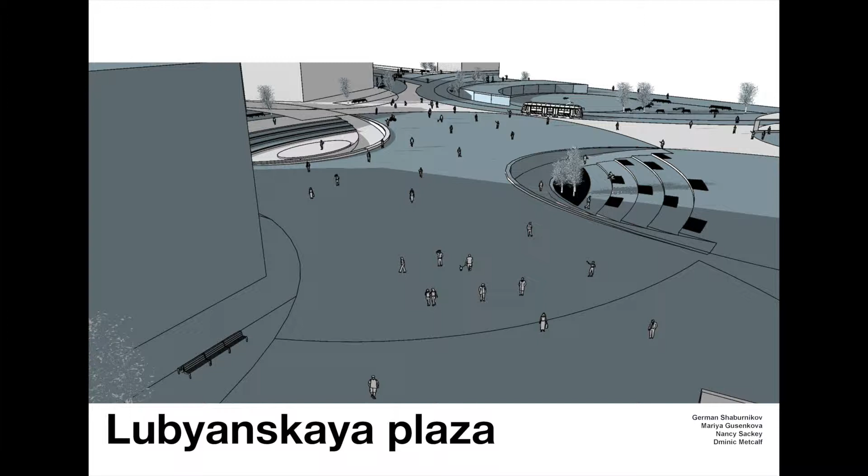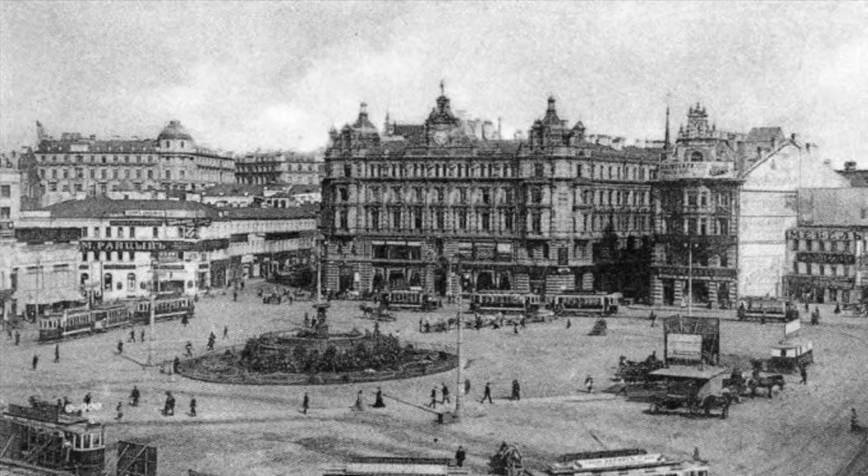Our development proposal focuses on Lubyanskaya Plaza, situated in the city centre of Moscow. The plaza dates back to 1480, when Moscow was surrounded by city walls, with this plaza situated next to one of the gates. Unfortunately, during Stalin's governance, these walls were demolished, making the space devoid of any function until the 90s. During this time, the mayor of Moscow constructed 2 buildings, widened the streets, and demolished the tram line. This deprived the people of a plaza, and subsequently pushed the priority of the space towards vehicular transport.

We will pedestrianize the space once more by demolishing these currently still residing buildings. The current, most popular walking paths helped us divide the plaza with a natural flow for people at the forefront of the design process. We will reinvigorate the space by replacing part of a 6-lane highway with a connection for several pedestrian-only paths. This current fence is a testament to how the current street is too dangerous to be crossed. Placed in a key junction in the city, it will attract people by forming a missing vertex.

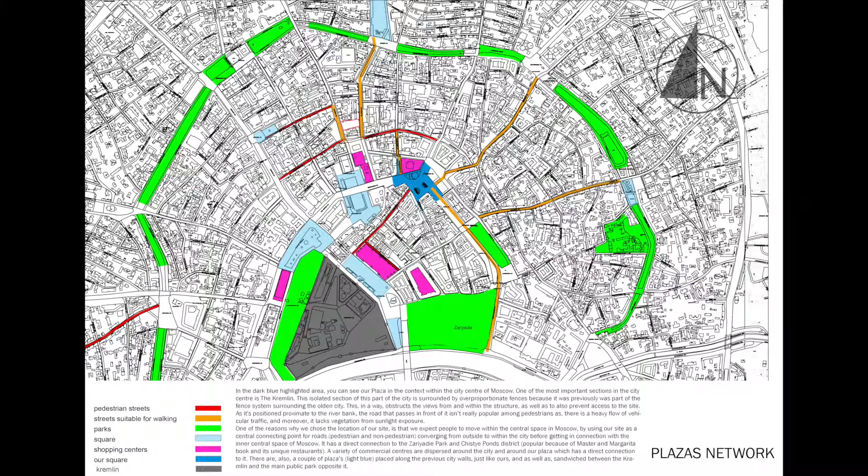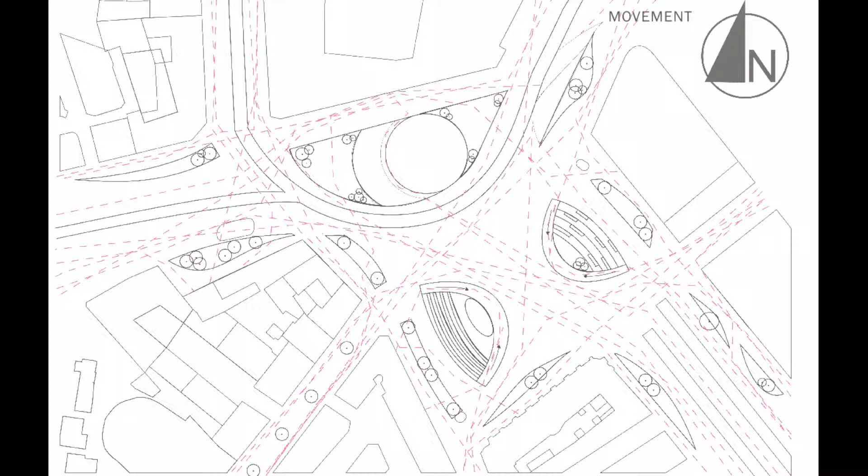One of the most exciting areas for opportunities is the activities that could be incorporated into a new space, as they are so absent. The approach of the new plaza is a reference to Moscow's past, adapted to the modern needs of society. Clearly, the organic flow dominates the conception of our ambition, achieved through a variation of the flowing material, color, and texture. It will guide the user through a space which was previously impossible to move through.

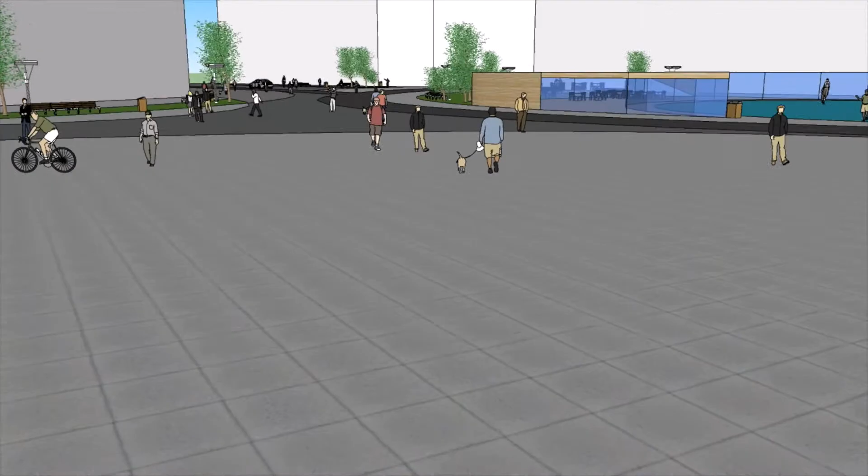The new design will feature 3 main compositional elements: the amphitheaters, southern communal area, and the water feature towards the north. The lighting will reflect this accordingly, drawing people to the foci of the plaza at night. The aim of the area to the south is to retain some of the flexibility, whilst also often including markets, adding a closer personal ambience.

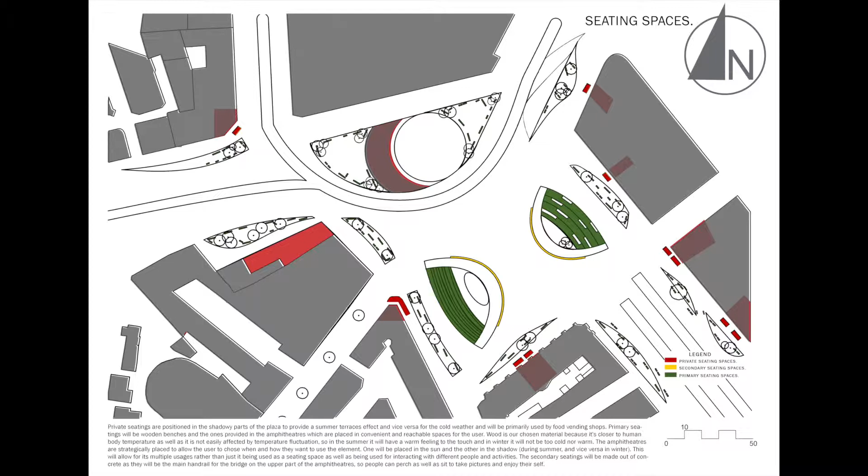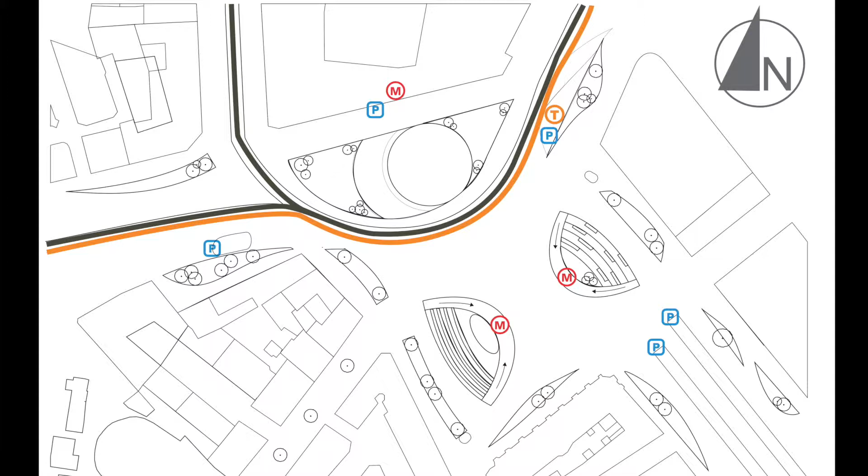On the other hand, the water feature is important because it includes an extension of the pavement, inviting in children to the playground through a natural safety barrier. It adapts to winter conditions, freezing for ice skating and also providing a sensory environmental connection. Likewise, the greenery will work to soften the stone of the surrounding buildings.

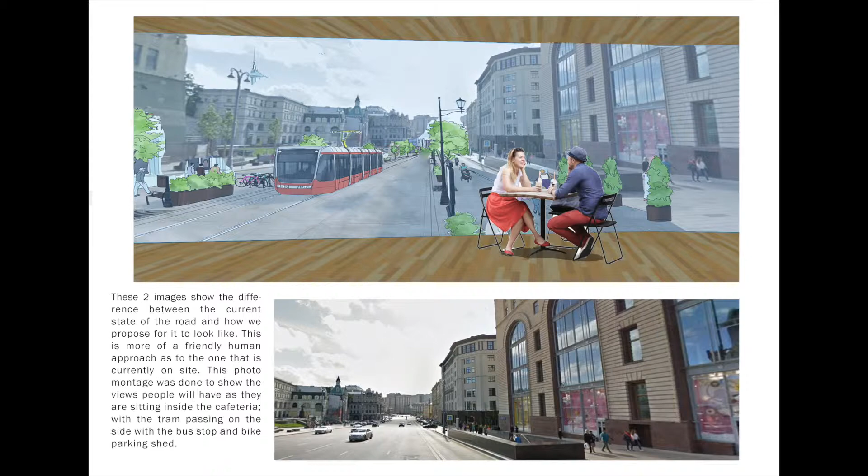The 2 southwestern buildings have been demolished, with a new continuous building replacing them on the opposite side of the plaza. Although this makes intuitive sense for the current buildings, this is done predominantly for the plaza. With this single architectural strategy, we are able to welcome in a fresh atmosphere to the plaza, unifying the space through a natural balance of the enclosing environment.

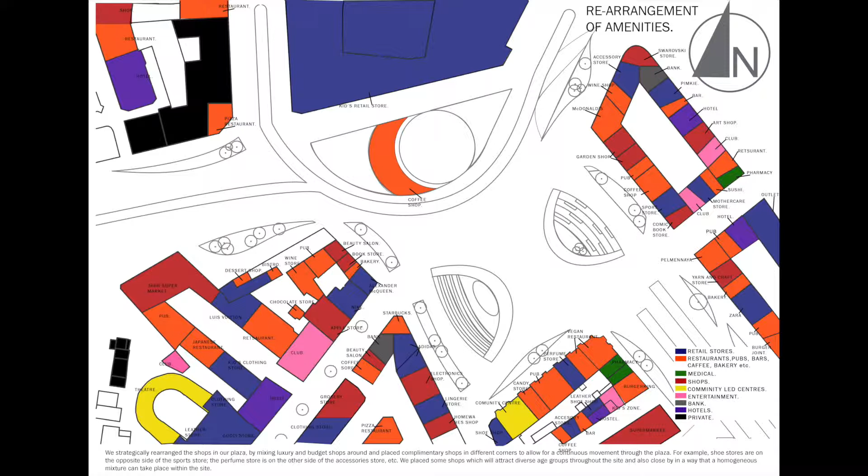By allowing for a variety of shops and services, we have improved the significance of the space to all ages of users, a plaza designed for the people of Moscow rather than its vehicles. It shows amenities that blur the line between public and private. As such, they will strive to provide a friendly and open aesthetic. This ensures continuity between the inside and outside.

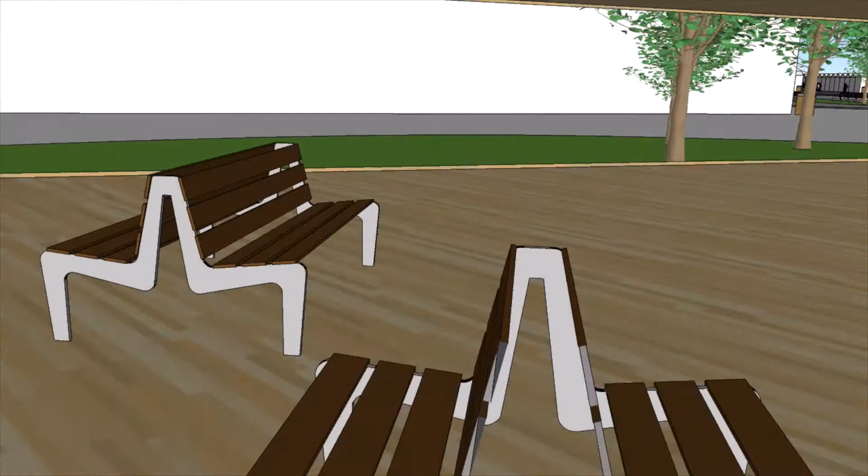The previous vehicular congestion was managed by retaining public transport access whilst restricting civilian thoroughfares. To the north, the historical tram railway will be recovered, alongside a singular one-way road. Similarly, the previous 7 metro stops were simplified into 2 central access points, which match the scale of the surrounding buildings.

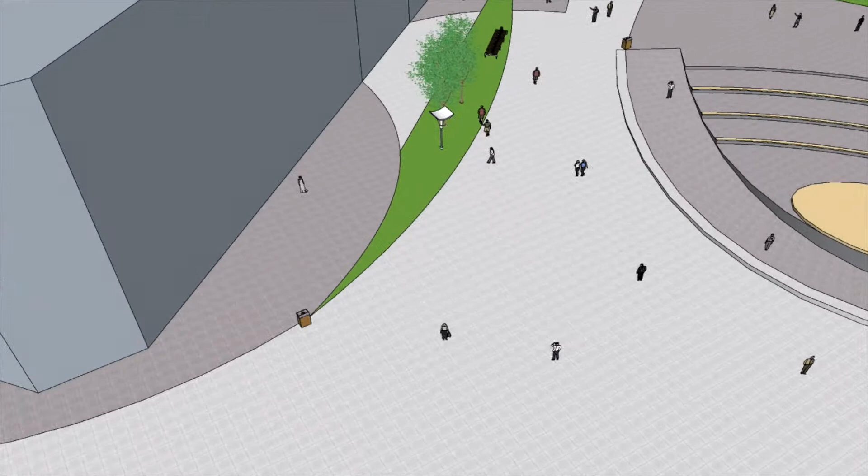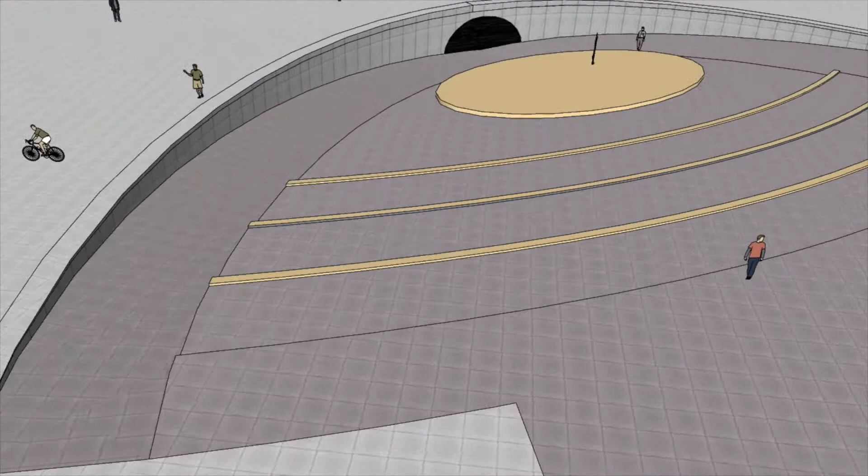Through this project, we have learned how understanding the behavior of people's movements through a space can help to reveal how elements can be placed within the urban environment to make it more successful. When these elements are placed strategically, with appropriate consideration for their context, they can allow for a consistently healthy and successful space.